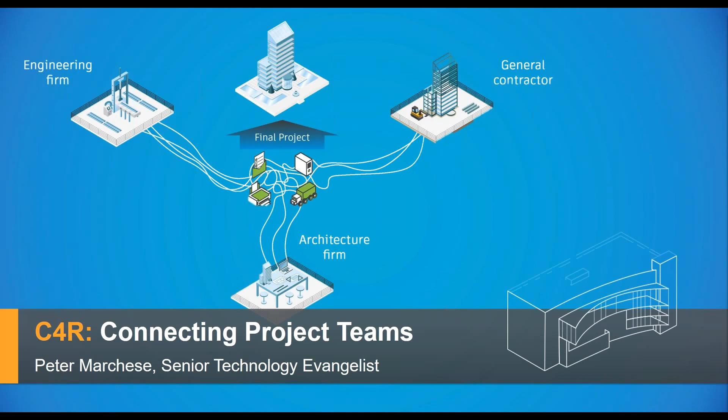So, connecting project teams with Collaboration for Revit. So our agenda today is I'm going to go over what C4R, Collaboration for Revit, is, go over how it actually benefits the project team members and how you can use and access this. I'll be using PowerPoint for the first part of this, and then I'm going to be moving into the software and show you how you can use it and access it from multiple access points: mobile, web, and desktop.

Now, before I get rolling, I do want to ask the audience a couple of quick questions just to get an understanding of what you're currently doing and how you're using your software. So the first one I want to ask is, how are you currently coordinating with other people? Is anybody here using Revit Server? Is anybody sending files by typical email or FTP or Dropbox? And is anybody currently using Collaboration for Revit?

All right, so kind of what I expected. The majority of people are using traditional methods of sending files back and forth. Okay. And just two more quick questions. How are you actually sharing content? Do you access content remotely, or is anybody using the web or Newforma or just typical email?

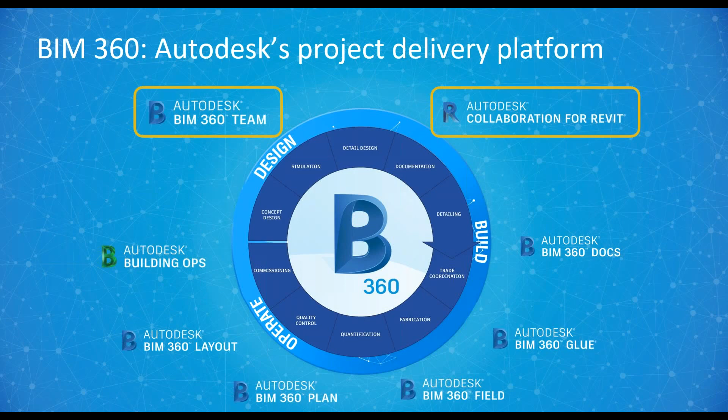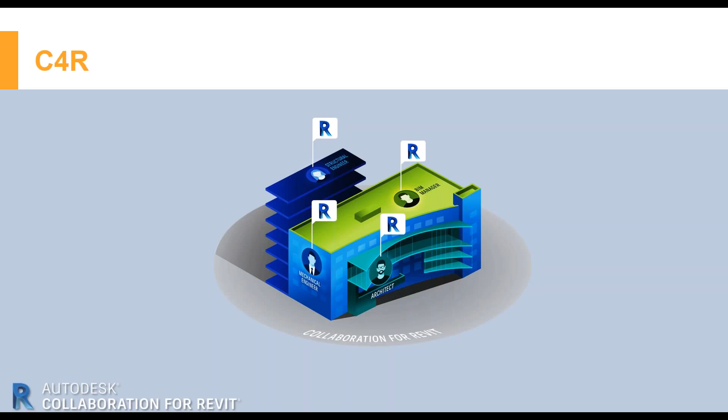Now, for those who aren't aware, what C4R is, it's a way of collaborating in Revit. You've got your different models. You've got the mechanical engineer, the architect, the structural engineer, and anybody else who happens to be working inside the Revit model. And rather than actually setting it up to the point where I send you my file, you send me your file, we're actually working together collaboratively. But it's more than that.

There are different aspects of collaboration for Revit, and one of them is BIM 360 Team. So you can kind of see that as like the outer ring on this. What that allows is all the other people that are working on the project but might not be working in Revit. It gives them the opportunity to participate, to view, to see what's going on without having to take 5 other programs and sort of put them into the mix.

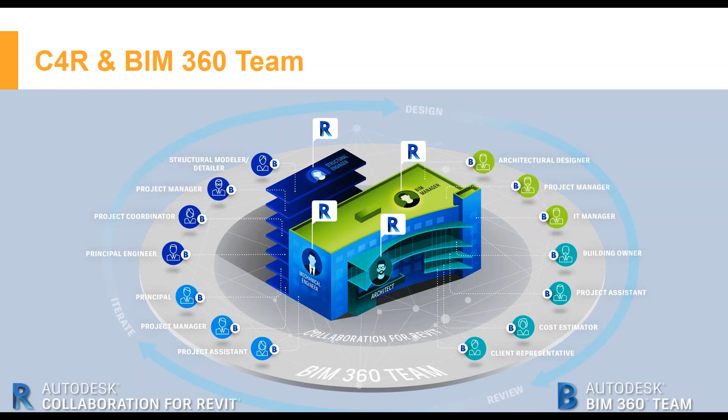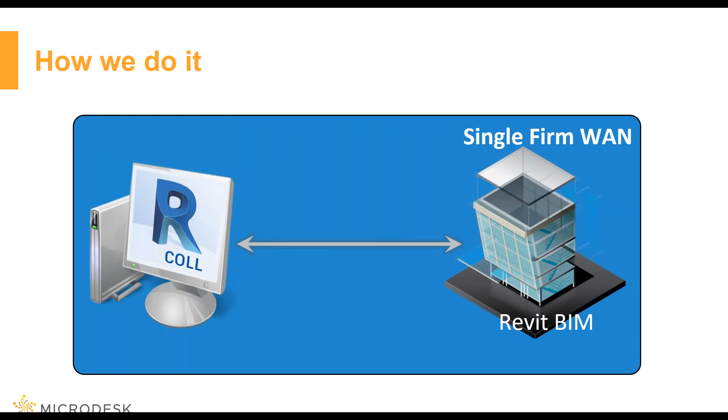So if you want to look at the little bit of details of how this works, typical process is I'm using Revit and we have a single firm and everything's on our network. What the Collaboration for Revit actually does is it takes that central file, so that file that we're all working with, and puts it in the cloud. Then from there, different firms are all accessing that cloud server.

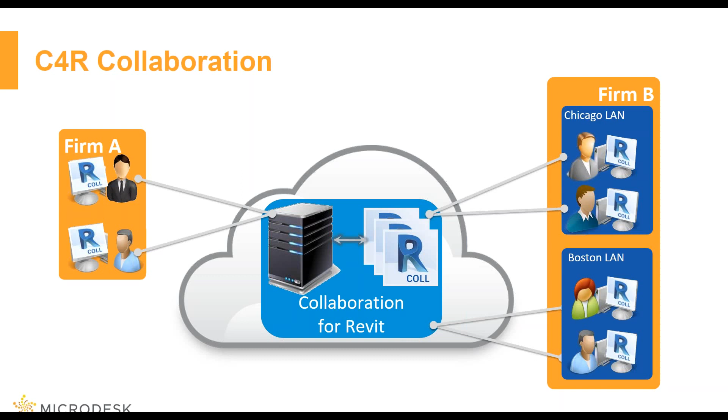So rather than having, I have my central file, you have your central file, and if we want to see them in the background, we have to link them, but we have to email them or upload and download. We don't need to do that anymore. We're actually all working off the cloud files. We're still working on them on our computer in our office, but we're able to sync and work back and forth and see exactly what everybody's doing. And again, I'm going to actually hop into Revit in a bit and show you this.

Now, some of the benefits of this are not just the fact that we can actually work together on models online and we don't have to be in the same office. Big part of this is being able to actually communicate, and there's a tool called the Communicator that comes with this. This makes it easy to actually have a direct chat window. You can also send screenshots directly as part of this, and you can have a team chat where you're talking to everybody else on the project or on different teams.

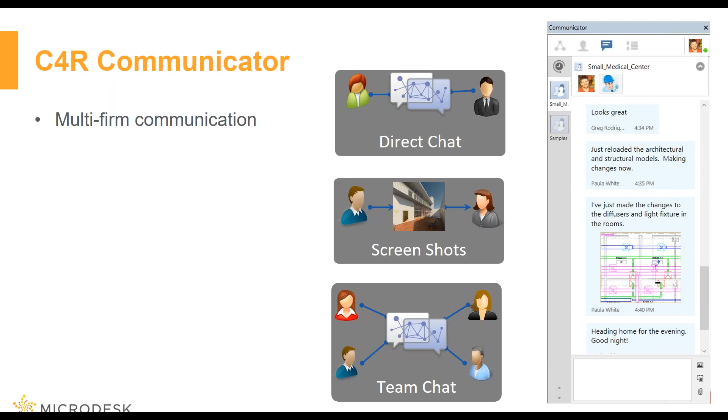Now, from the standpoint of a project manager, it's not bad. You can only add people to this that are working in the Revit model, so you don't have to worry about people using this to talk to friends that have nothing to do with the project. Now, the other thing is it knows what people are doing to a certain degree, and it knows who's actually in the project. So when I talk about contextual awareness, it can show that somebody is actually in the process of syncing. It can show me if somebody is in the current model that I'm in or in one of the other models that are a part of the project.

Another one here is the integrated work sharing feed. So if anybody here has ever used the Revit work sharing monitor, that essentially is built into this. So that way I can track who's syncing. How did it go? Did it fail or was there an issue? So it allows me to get a glimpse of what's happening with everybody else in the project.

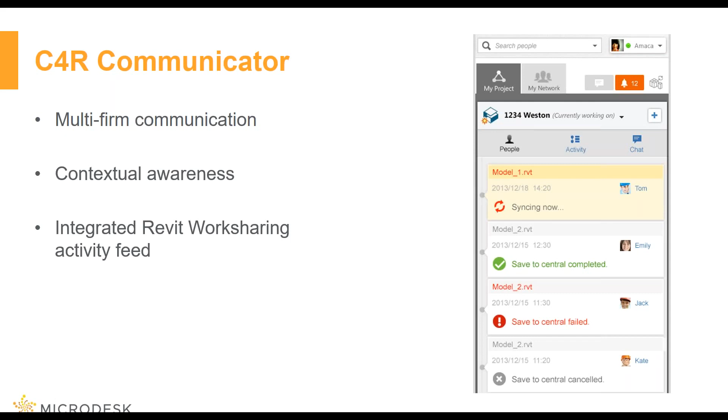So if we're getting ready to print, I can use this Communicator to send out a message to everybody on the team saying, hey, I need everybody to sync, so that way I can actually set the print and I have all the latest information. And then I can use that same tool to track and see, did everybody finish syncing?

Now, excuse me, I keep mentioning BIM 360 Team, and that's because it's a fundamental part of collaboration for Revit. Now, you can use BIM 360 Team completely on its own. You can use it as a cloud sharing and storage site. I can view models and content, but if I'm using collaboration for Revit, I'm going to be on Team. That's actually where my central file will reside.

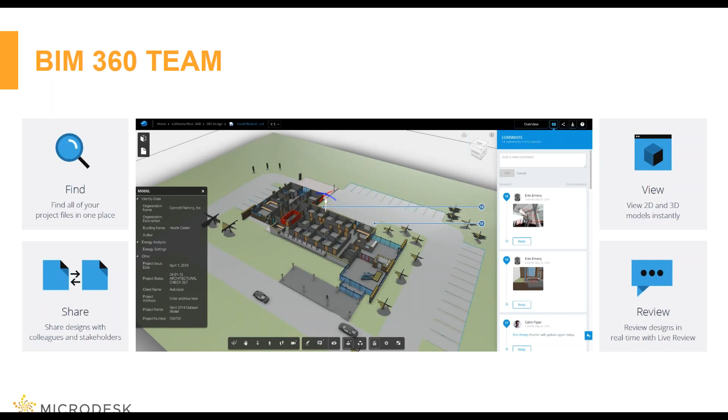So by syncing my model, I'm actually syncing it to BIM 360 Team, and it gives me the ability to find and search. I can track what I'm doing. I can see who else is in there and follow the activity. It gives me the benefit of being able to view my model live in a web browser or on a mobile device. I can do live section cuts.

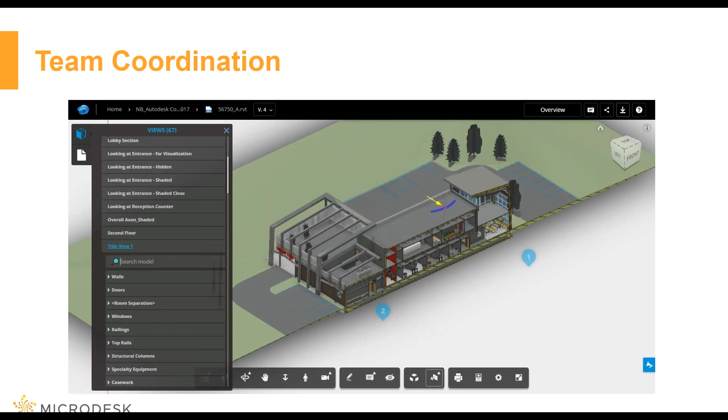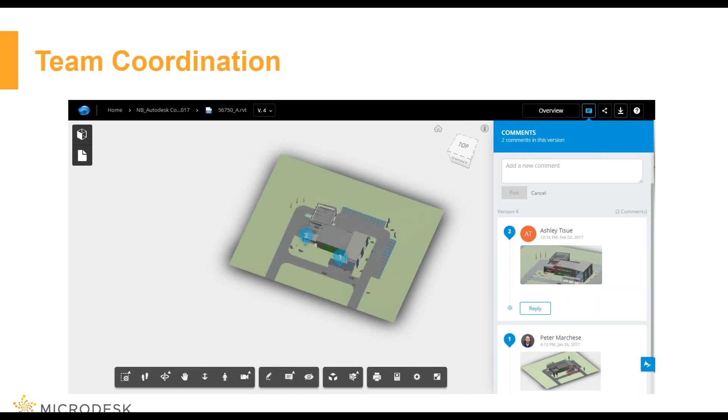So if you've ever had a project manager who liked the idea of Revit but was nervous about using Revit, this allows them to interact with the model, to put in comments or markups and be a part of the project without actually needing to know how to use Revit or be in Revit or scare their team because they're in Revit. And again, this allows me to use multiple devices to be able to track and follow it.

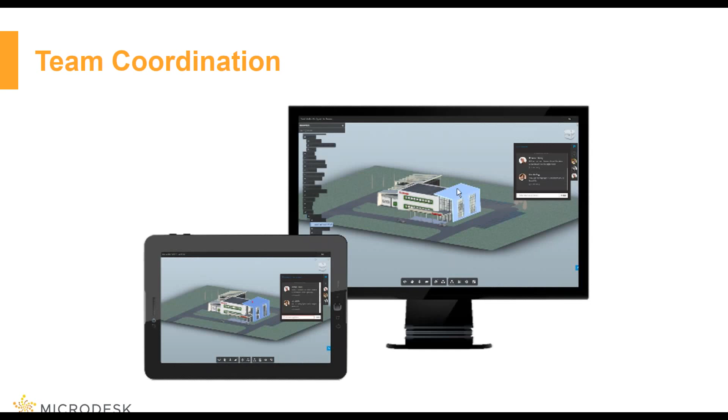And another really big feature from a project management standpoint that I don't think a lot of people are aware of yet is the fact that you can actually track the changes of a model automatically.

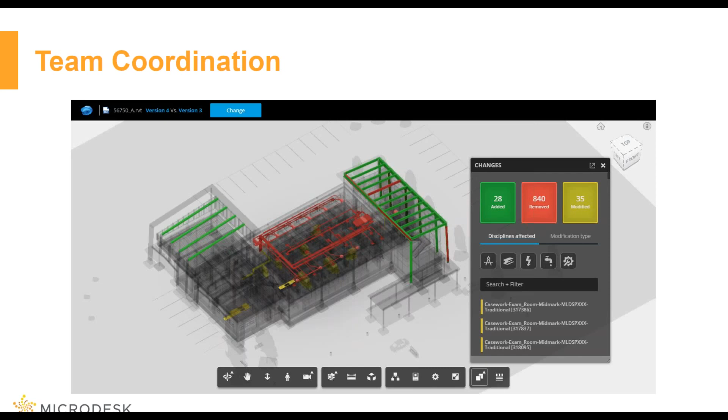I don't have to do any work for this. No one's sending me a transmittal saying we moved these 20 things. I tell it, I want you to look at this version and that version and tell me everything that's changed. And when we start talking about all this, versioning and viewing, there is a large amount of content that we can upload to the cloud servers, in this case BIM 360 Team, and view it.

Now, a lot of people like Dropbox. It's a great tool, and it's designed more for Office. So if I'm uploading Excel or Word to Dropbox, I can view it in the app and the website, and everything's great. It doesn't really lend itself well to AEC, though, and that's where this comes in.

It's designed for that. Not only can it view and read and save and track the project documents like Word and PowerPoint and images, but it's also designed to work with things like my Rhino, my SketchUp, my Revit, Navisworks, AutoCAD. I can upload my content to Team and view it and share it that way.

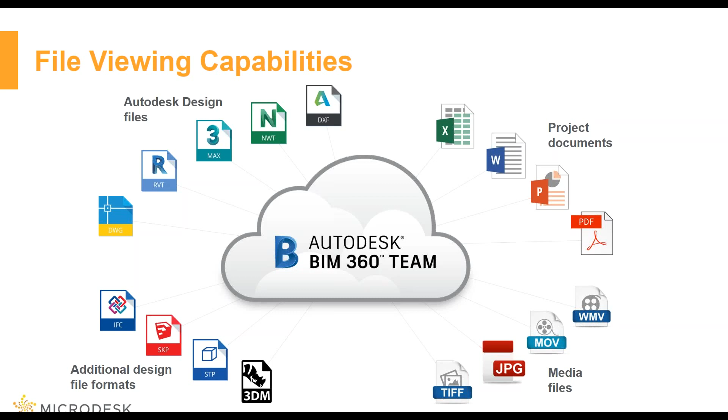Okay, enough of the PowerPoint. So time to actually hop into the software. So what I'm actually going to do is hop into Revit now. Now, one of the cool things about collaboration for Revit is that as you're using it, your typical day-to-day workflow doesn't really change.

The biggest change that's going to happen to your normal draftsperson is where they actually look for the file. So when I go to Open, rather than navigating to my office directory, I'm going to click on BIM 360 Team, and it's actually going to show me all the projects that I have been invited to. Now, in here, I can see a lot of different projects. So if I click on this one, I can open that, and I'll see the different files that are inside of there.

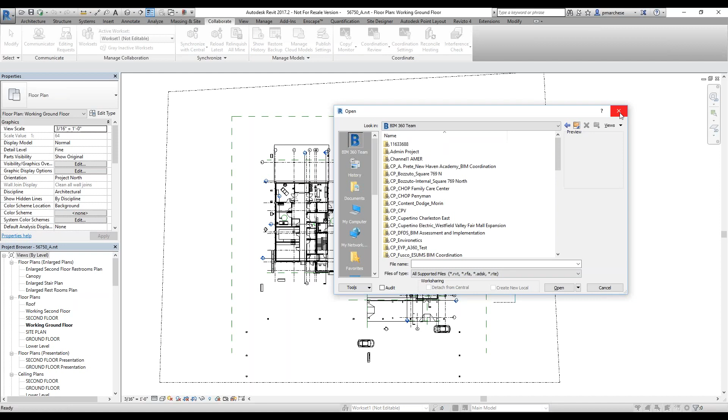Now, a key thing on this is it's not showing me all of the files or projects that I have access to. It's showing me all of the projects that I have access to that are the same version as the Revit that I am in.

So we actually did get a question on this earlier. When you're working collaboratively in Revit, everybody needs to be on the same version. I can always upgrade from an older one, but I cannot downgrade. Same exact thing on here. If the project is on 2017 or 2018 or 16, everybody needs to be on that same release to work with collaboration for Revit together.

So in that case, I would open up my file. It'll download it from the cloud, and then from that point on, it'll always update my local file with the changes that are happening from the internet. So if I have a 300 meg file, I'm not downloading 300 megs every single day. I'm just downloading the changes to my file.

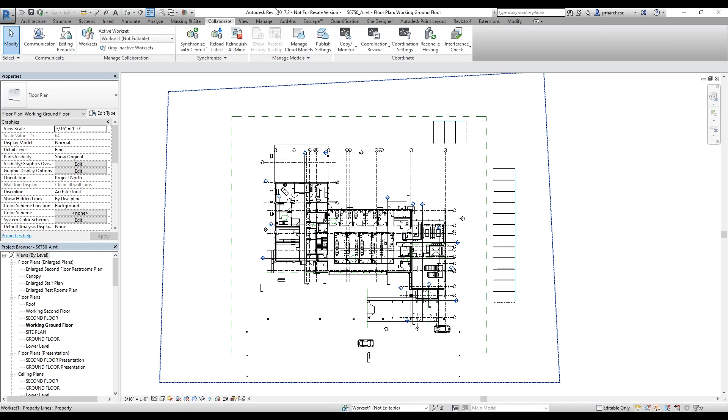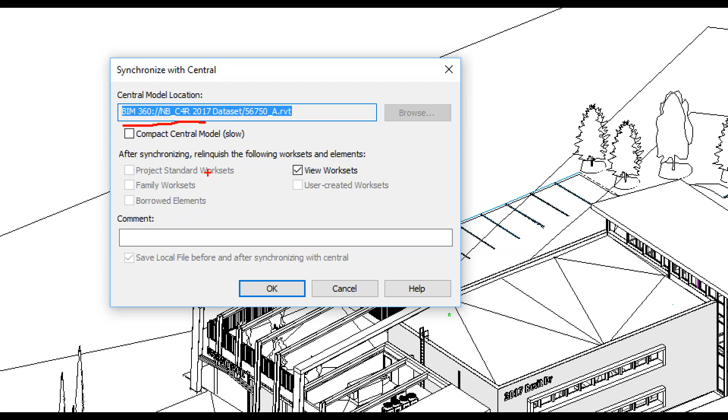So as I work day-to-day, I go about my normal business, make my changes, edits, markups, whatever has to happen, and then I would synchronize. And sync to central hasn't changed at all. The only thing that's happening is that now when I sync, notice it's actually syncing to the cloud. It's not syncing to a local network drive. But to a normal user, that's transparent. It's not going to affect how they actually work.

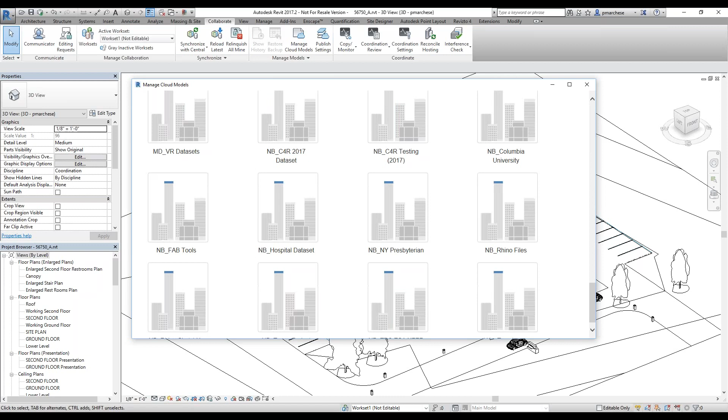To somebody who is sort of the model manager, they're going to have a couple of extra features. So if I say Manage Cloud Models, this will show me all the different projects that I'm a part of. And in the case of the one that I'm in right now, if I go down to my, let's see here, there we go, data set, I can see the models that are in here.

Now, one thing you might notice is that I have this little box with an arrow. However, this one here is a green checkbox. If I see that little green dot, that lets me know that the version that I am in right now in Revit is the same as the version that people will see on the website. If I look at this one up here, that means the version I'm in in Revit is not the same as the web version. Now, that's not a mistake or a problem.

What that means is that I'm working in Revit, and everybody else who works in Revit, we're all going to see the most recent model. I sync to central, you reload latest, you see my changes. That's as it should be. But if I invite someone just to view the progress, they're not actually a part of my project, they're just going to the website and actually looking at the progress of the project. Maybe it's the client.

I don't necessarily want them to see my work every 5 minutes. I might want to go to the format where I publish the work to them every Friday or once or twice a week. In that case, that's what I'm doing right here. I'm essentially publishing my work to the cloud for others to be able to view. And Revit takes care of all of that tracking. So I can upload this, I can publish it,

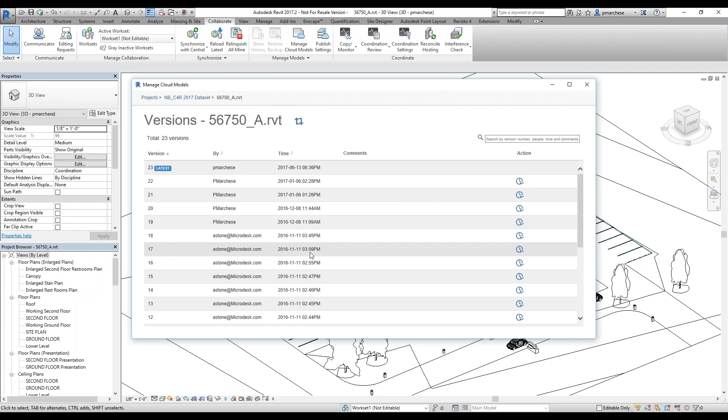I can view the different versions of my model. And unlike the desktop where I tell it how many backups I want to keep, this tracks all my backups. I can see when I saved, when other people saved, what version it is. I can roll back if need be. So I have full control over all of my backups to archive or to manage my project.

Now, one of the things I mentioned before was my communicator. So when I bring this up, I can see that I'm here. I see which project I am currently active in. And right now I can see that the other people that are a part of my project are not currently working because their status is showing up as gray. So if they were actually in one of the files in the project, not even the one that I'm in, but maybe the mechanical or the structural, they would show up as green, and I would see which file they were in. And I can also see the status of the other projects that I'm a part of.

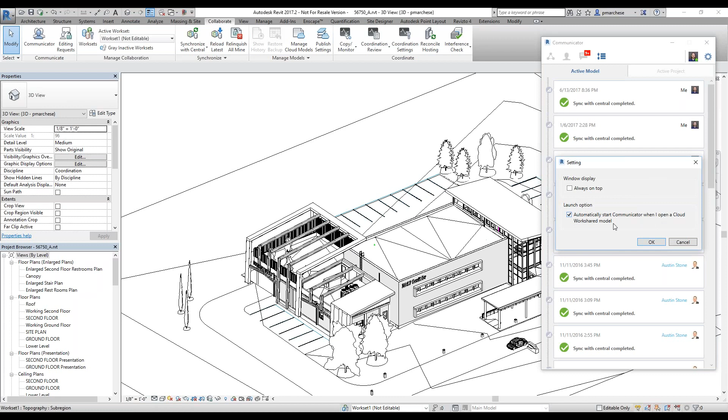I can move into them. If I need to, I can instant message or chat with other people and see what's going on. And I can move back and forth between multiple projects, as most of us probably are, working on more than one project at a time. And then as I work on this, I can see what the status is, what's going on, when it's saved last, and how things are going on. And I can actually modify some of my settings in here to keep it on top, or to say, you know what, only open it up when I want to.

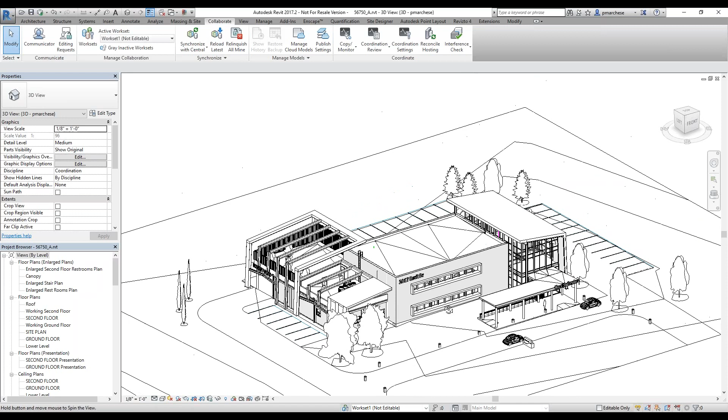But that's one of the nice features about C4R is that it's not going to really change your day-to-day workflow. It just enhances it with better coordination abilities. Now, there's one other thing here called publish settings. I'm going to touch on that in a minute or two once I get to the web portion of this. So you're working normally, day-to-day. I publish to the cloud, and now other people in my project, they'd actually like to see what's going on. So what I'm actually going to do is I'm going to open up my web browser for a second.

And I've gone to the BIM 360 Team site for Microdesk. So I can see the different projects that we have. I can see the current activity to the site. And what I'm actually going to do is I'm going to hop into the project that I was just inside in Revit. Now, in here, I can manage my project. I can see who's a member of it. I can check my activity. I can see if there's any discussions or a calendar.

So if I wanted to put something on this calendar to ensure everyone on this project knew when our deliverables were, what the due dates were, what had to be done by a specific point in time, I can put that in there so it's in a central location to everybody, not just the people in my office. And I also have the ability to have a wiki. The wiki could essentially be the project BIM execution plan. Again, if I want to put it in a central location, it tracks versions. People can get notifications when it gets updated. I can put that there.

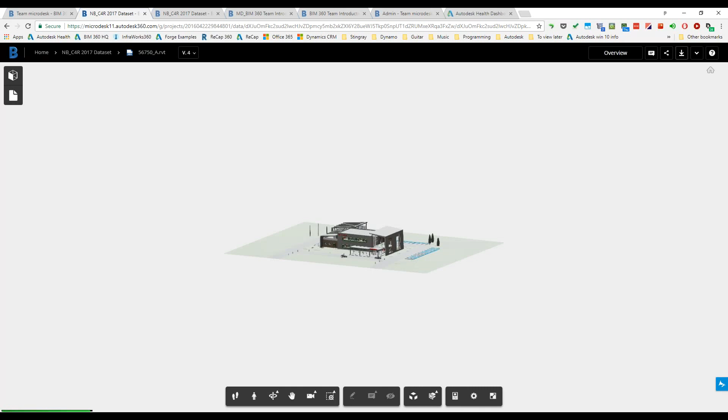But what I'm going to do right now is I'm actually going to click on my file. And again, I can see that I'm currently in version 4, and I have typical sharing and download features. So click on this, it'll think for a second, and then I can view that. And key thing here is I don't need plugins. I don't need to download anything extra. I'm just using a web browser, and now I can actually navigate and interact with my Revit model right here.

If I click on elements, I have the ability to isolate, hide, focus, or look at the properties. The information that happens to be in these objects will be visible. Now again, this is more of a viewing tool. I'm not going to start changing information here.

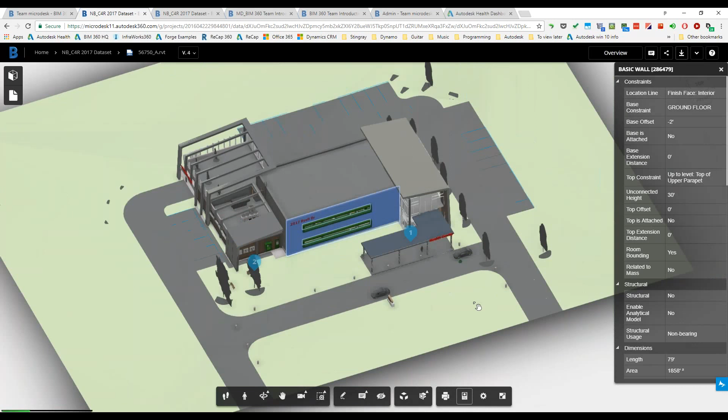This allows me to start to infer information from the project. Now, one of the things I mentioned I would cover again when I got in here was what I could see. If you remember back inside of Revit, I had that publish settings right up there.

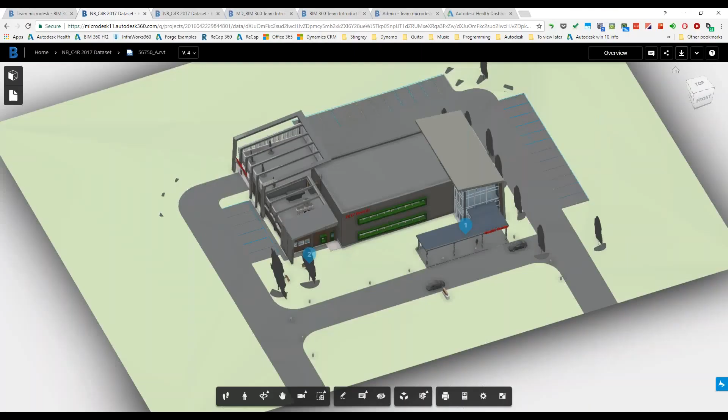What that actually allows me to do is control what views inside of BIM 360 Team are visible. So if I'm publishing this for people to see, people that might not be part of the design team, whether it's the client or an outside consultant, there might be working views that have notes or look like a mess if you're not aware of what's happening in the design. I don't want those to be visible. So I can choose exactly what views I want published with that version of my file.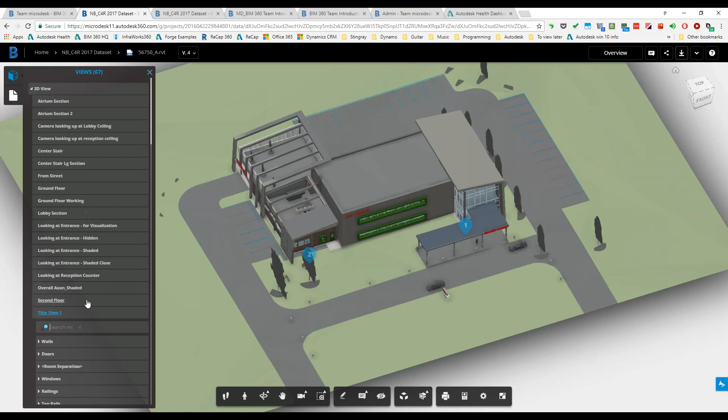So when I'm looking at this now, I can see my 3D view. If I want to move to a different view, I can. And it's not just 3D views. If I want to look at elevations, sections, floor plans, or even the sheets, I can do that as well. So if I go to my site plan, this will switch from looking at a 3D view to my site. Not a very well done site plan, but a site plan. And when I'm looking at my sheets, I actually have the ability to do dimensions as well. I can get measurements off my drawing. And I can also print this directly to a PDF now too.

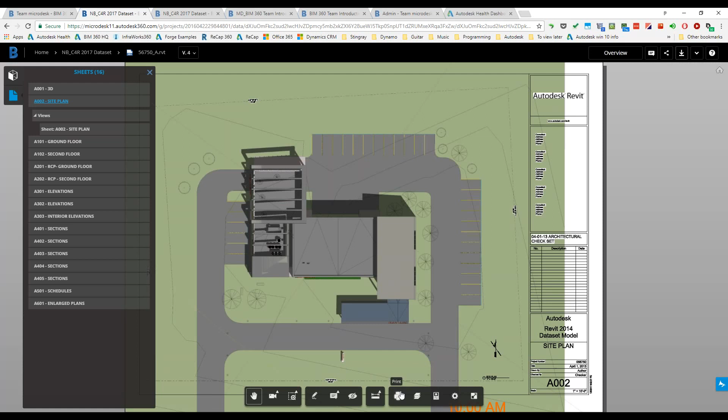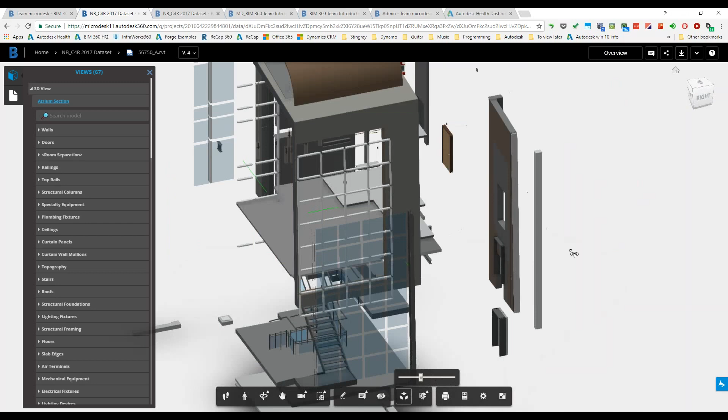For now, I'm just going to hop back into a 3D view for a second. And if I'm looking at something and I'm not sure about it, I have the ability to sort of disassemble it a little bit. So for sections like this, where I'm trying to get an understanding of how something is coming together, how it's being constructed, this helps me get an understanding of it. Additionally, I can always just do a live section cut too, so I can sit here and just drag this through in the web browser, so I have a better understanding of where things exist and how things are.

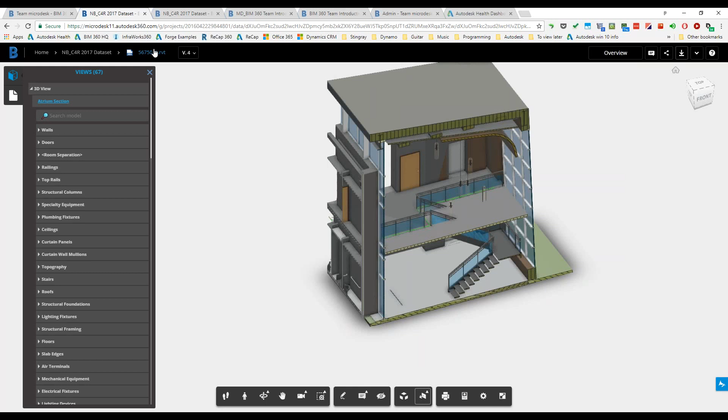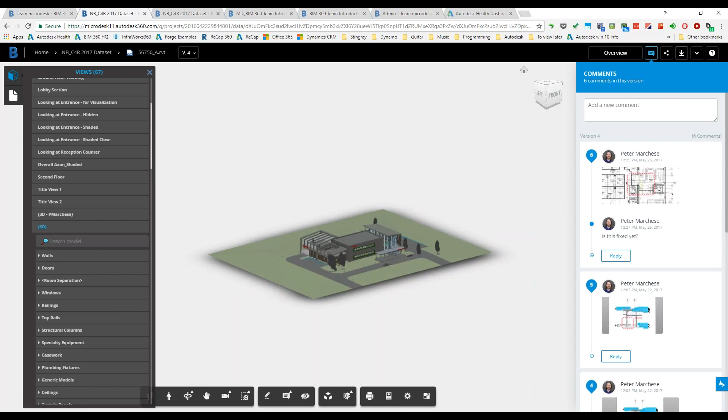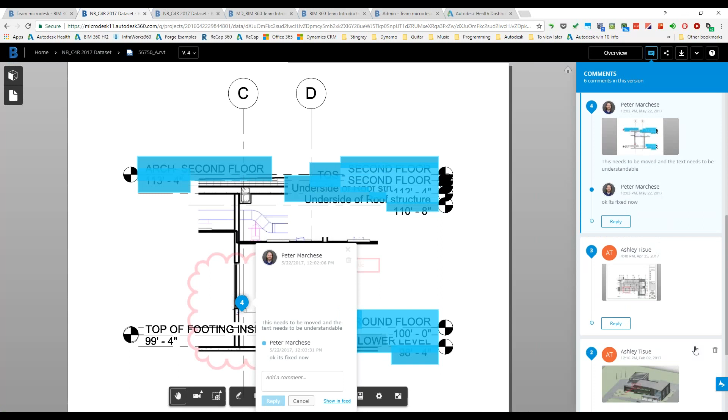Now, outside of this, there's a lot of other tools I can use. I can do my markups, I can do my coordination, and I can put my comments in here. So if I have somebody on the team reviewing this inside of BIM 360 Team, maybe they're looking to move away from printouts, or they're trying to lock in on one thing, I can use this to actually track my markups. I can create clouds or callouts, put in text and comments, and I can actually see when that was done and what version of the file I did that in. And then somebody can respond to me, okay, it's all fixed.

And if I have something I want to show to somebody, but I don't necessarily want them to be part of the project, one of the things I have the ability to do is a live review. What a live review is, is that I can invite somebody to see this. They're not part of the project, but it's sort of a guided tour. I can actually lock my camera to their camera, so when I say okay, now if you look at this, I know they are looking at the exact same thing that I am. It makes it easier to control what other people are seeing. And when the live review is over, so is their access. So you can manage that.

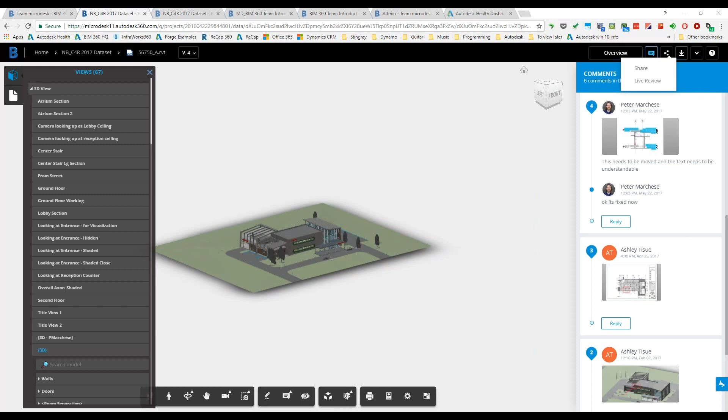A question that came in is, can you use this for spatial coordination on a project? Yes. So if I want to, I can create my section boxes, bring this in, and actually rotate the section box if I want to cut around something and move through the process.

One of the things I mentioned earlier is that if you're using collaboration for Revit, you're going to have to use BIM 360 Team, that's where it stores its central file. But you can use Team completely on its own. In that case, I can still upload, just drag and drop my Revit files to the cloud, and I can still use this kind of feature to mark up, comment, and view those models.

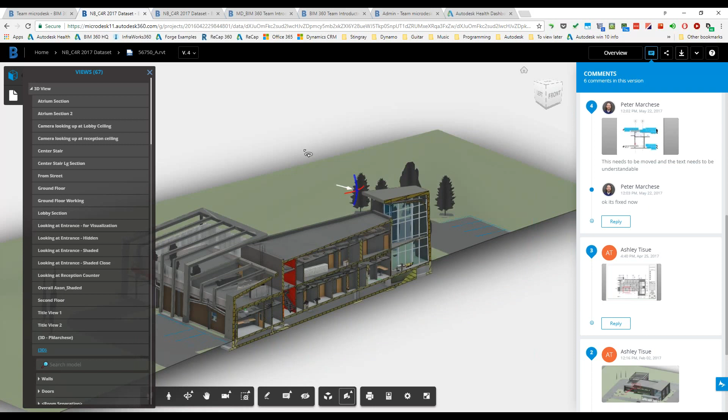Now, one of the other things I mentioned that I really like here is the ability to compare versions. So in this case, I'm going to say compare versions. It opens up another tab, and I choose which versions I want to look at. So in this case, I'll say version 3 against 4, and I tell it what view I want to look at for this.

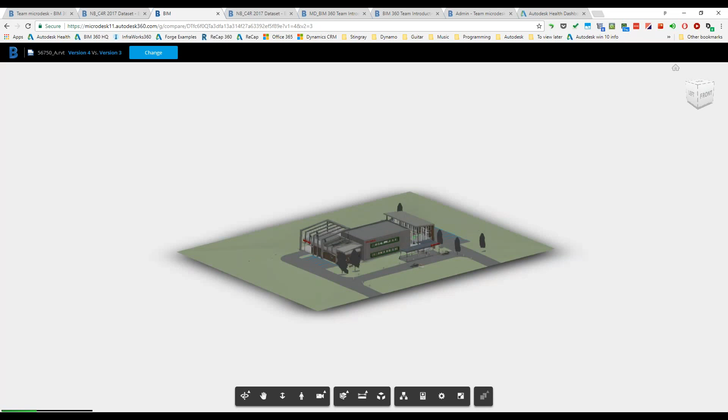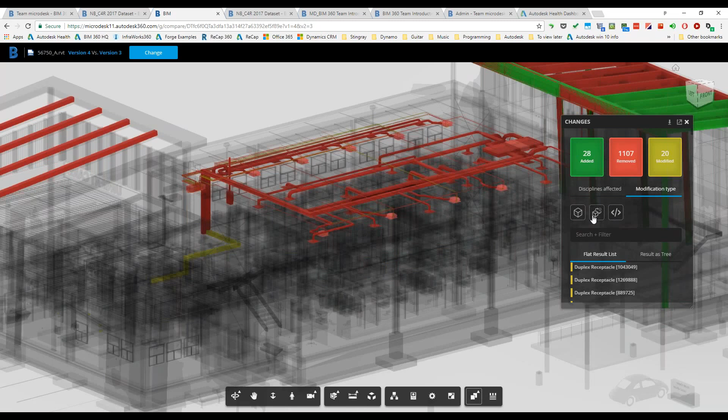So it'll think for a second, and when it finishes, anything that hasn't changed will be a translucent gray. Everything that's been added will be green, demolished will be red, and modified will be yellow. And the wild thing about this is that when I say modified, I'm not just talking about they moved it left or right or up and down. It also looks at properties. So if I've updated a door to have a fire rating or a hardware set, I can go to my modification type and say all I want to know is if they've made property changes, because I can filter, search, and look through this.

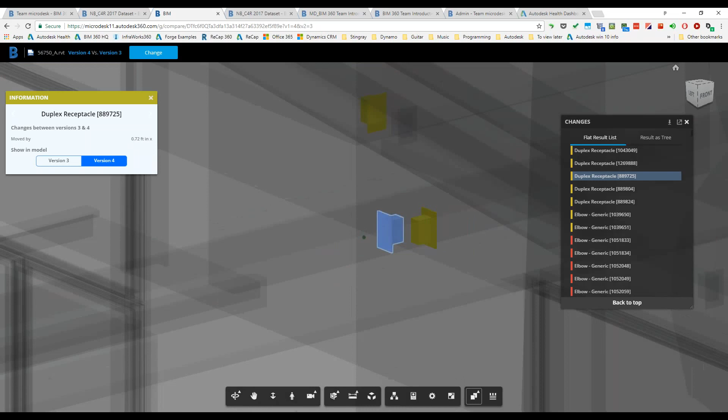If I click on something down here, it'll actually take me to it. One of the neat things here is that if I click, I can actually animate the process. So, okay, it moved. Where did it move from? I can go from 3 to 4, and I'll actually see it tell me specifically the distance it went, and show me physically how it actually changed. So it makes it a lot easier for me to actually understand what's happened.

So if I'm receiving files from my other consultants, no problem. Now I can actually say, okay, well, this is the new one they sent me. What am I looking at? What did they change? Did they change the things that I expected? Are there little things that I would have completely missed had I not been using something like this to track all of the changes?

And there was a question earlier about the versioning. Basically, if you're in Revit, everybody has to be in the same version. However, all the things that I'm showing here are available for all the versions of Revit that work with collaboration for Revit. So 18, 17, 16, you're fine for C4R, and all these features will work in Team as well.

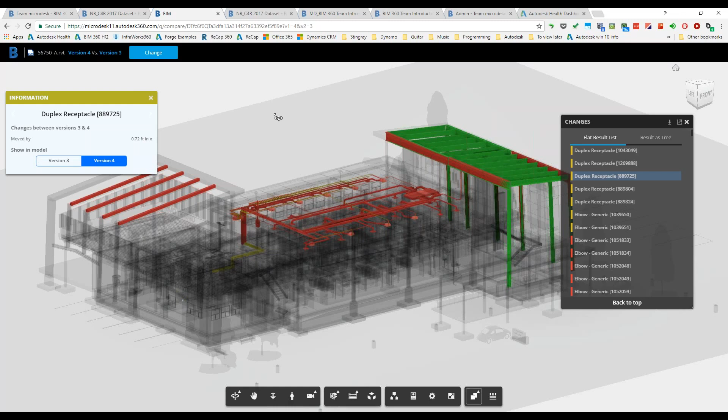Okay, now there we go. So we've got our BIM 360 team on the website. I'm able to interact with our models. I can see the comments that people have. Now, let's say what I'm doing is I'm on my way to a project meeting, and I need to show something, but I forgot to take the model with me.

No problem. Let's say you have a tablet. In this case, I'm going to go to the same project I'm looking at now, and you can see the question about 18, no problem. Works on 18 as well, and 15 too. This data set just happens to be the 17 one.

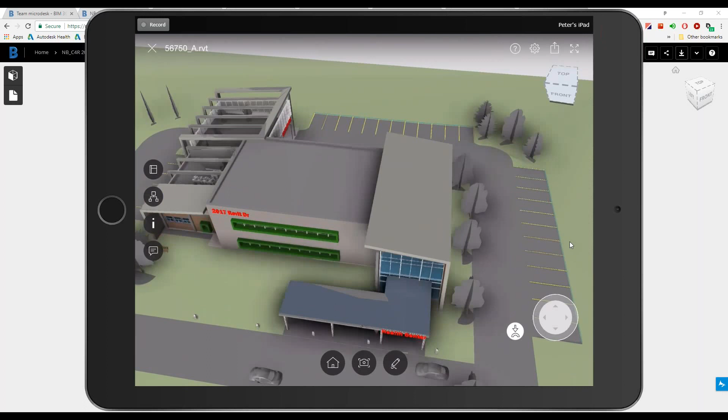So I can see the exact same models that I had online. Click on that, that'll open it. Now I don't have all of the same features, but if I want to navigate the model, I can look in here. If there's something I need to actually see, again, that 1 and that 2, notice the same thing.

1 and 2, my comments that I have are part of the project. They're not part of the website. They're not part of the mobile app. It's part of the BIM 360 team. I can click on that, and that shows me who did it and shows me the note.

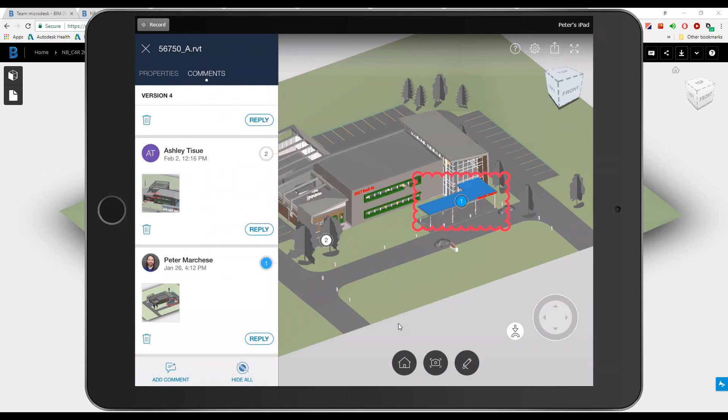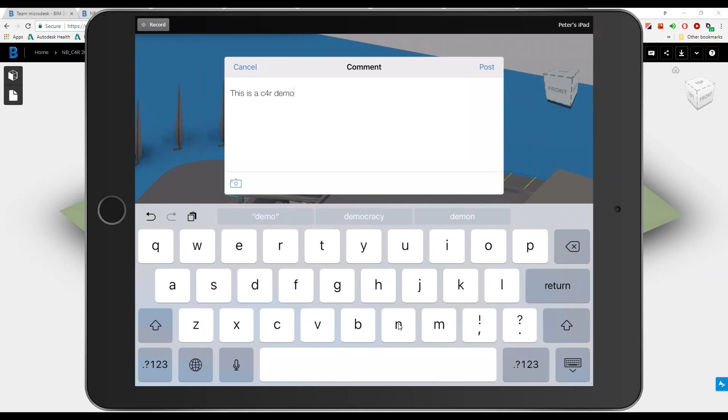So I can go back and forth and see the comments. And if I need to, I can always say add another comment. And post that. And now I can see that.

And that was in version 4 of the file. Because it knows not just when from a timestamp, but when from a model progression that I put that in there. And if I needed to do a markup, I would just tell it I want to do a markup, and then I can draw.

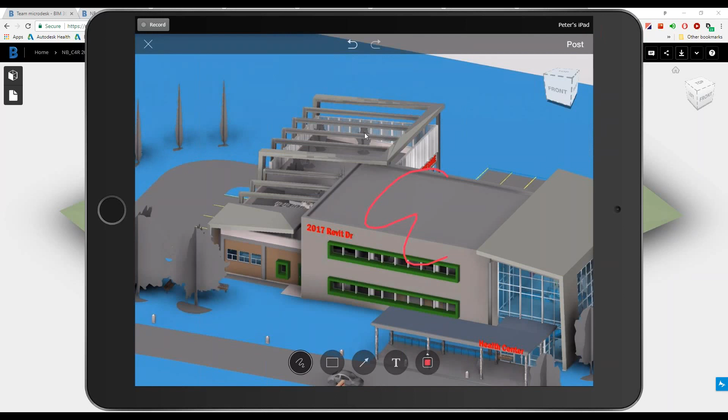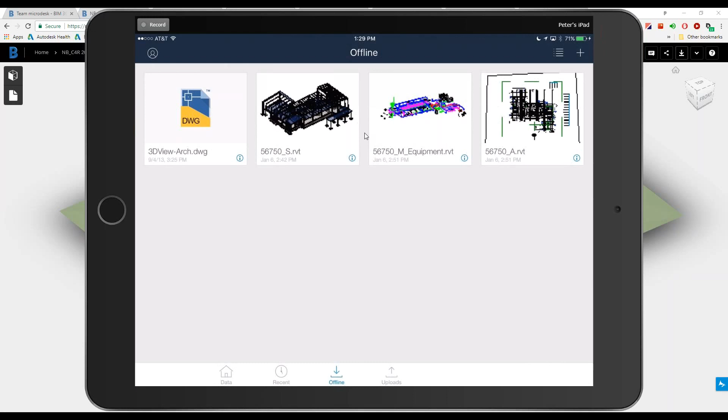And once I've opened up this file, I can still get my properties and information out of it. But because I've opened it up, it's now on the iPad, so I can actually open this up offline. So if I'm going into a meeting that has really bad reception, or I'm going to be in an attic or a basement, and I need to have my drawings with me to actually review things or to mark them up, I can use this for that.

And again, I can see my activity in the project, and if I've set up a wiki, I can see it here.

Now, in terms of a wiki, I'm going to switch over to another project we have. So if anybody is curious about what models might look like on the side of Team, definitely reach out to us after the webinar, and we can invite you to an introduction project that we have.

And one of the things we actually have in here is our wiki. And that is basically just formatted just like you would a Word doc. It has some information like frequently asked questions, how you can use things. You can put in graphics and information.

So a lot of our clients that use this, if they put information in the wiki, it's contact information, who to reach out to for what people are working on the project. And you can have multiple wikis, you can edit that, and you can put comments on it too, just like anything else.

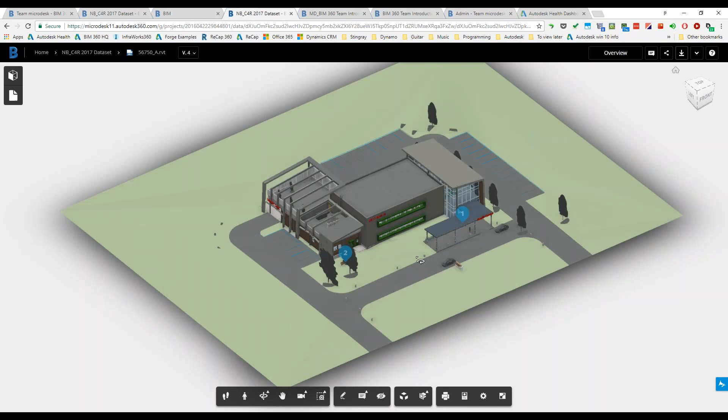One of the main things here is that everything is meant to be very user-friendly. I can always look at the different versions of the file. If something goes wrong, I can always promote an older version and roll back. And I can always see the overview of my project and the overview of each individual file at any point in time.

One of the main things here is that collaboration for Revit's focus is being a collaborative environment. There's two aspects of it: you've got the BIM 360 team and the collaboration for Revit.

There's a question about whether you still need to use copy monitor. I would say yes. The reason is that compare changes will show me what's changed in the model, but it's not going to update my model. So if I'm using copy monitor, say between the architect and the structural engineer, to ensure my grids stay coordinated, this service will tell me if objects have moved, but they're not going to be able to move elements in my file. Same thing for an architect and MEP, for fixtures or services like toilets or lights that we're coordinating via copy monitor. So you would still want to use that in addition.

Another question is how an owner might actually use collaboration for Revit. A lot of times if we're talking to owners about something like C4R, they're looking at it from the standpoint of facility management or maintenance. So now I have a site that can hold all my drawings, models, and information in a place that's easily accessible and understandable. If I need to find out where something is, I can search in the model, draw things on it, and say we need to fix this. But it's also, from a design standpoint, an opportunity to engage the project team, so it's easier for them to understand what's happening when you can use something like a guided tour to show them your design intent.

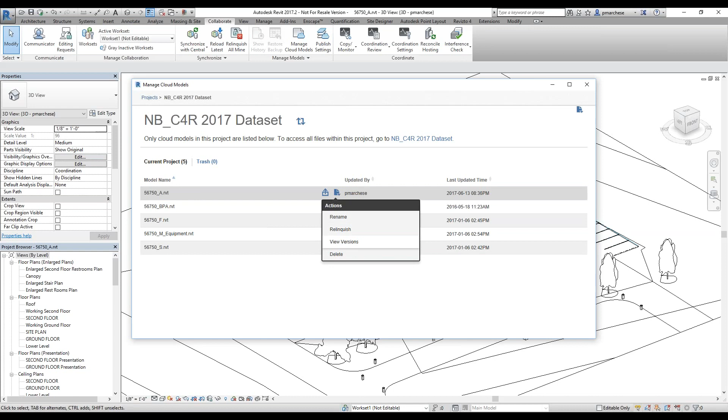When I'm looking at this, I can see the different versions of the file I'm looking at right now. Currently I'm looking at version 4. Now if I switch back to Revit, what I'm actually looking at is the same file, and I'm going to say I want to see view versions. What you're going to notice is that these don't necessarily line up.

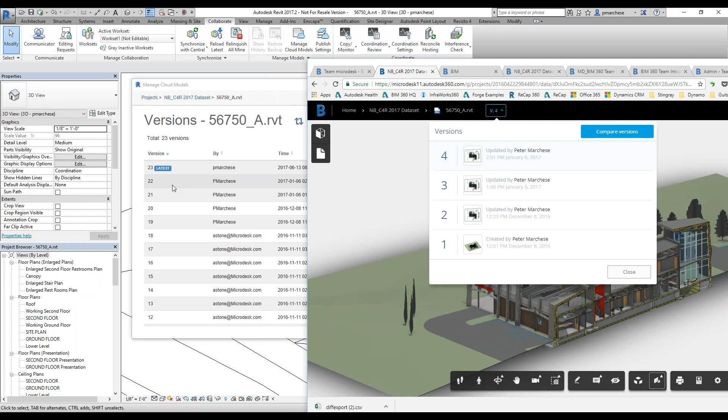The version that I see in the cloud are just the published models. The version that I see inside of Revit is every single time I sync to the central file. So it's very much like my internal saving process. I'm on version 23, but I've only published it out 6 or 7 times.

Question: what is the difference between syncing with the cloud model and publishing your model to the cloud? That's exactly what we just looked at. When I sync, I'm saving the Revit file for everybody else who's using Revit so they can see my changes. But when I publish it, that means somebody who goes to just the web or mobile version will see that change. And it's always going to publish whatever the most recent Revit save is at that point in time.

Another question: do all team members need to have C4R, or is this something a model manager can control? Anybody who is just accessing the website, they're just using Team, they don't need C4R. All they need is to be invited to the project, and there needs to be a seat of Team available for that person, or an entitlement. However, everybody who's using Revit is going to need an entitlement for collaboration for Revit. And for using the BIM 360 iPad app, the app itself is completely free.

And if you are using A360 Drive, you would use the BIM 360 Team app to view that too. But all you need to access Team is just an invite to a project, and the person inviting you would just need to either have a free seat to assign you, or your company would have one.

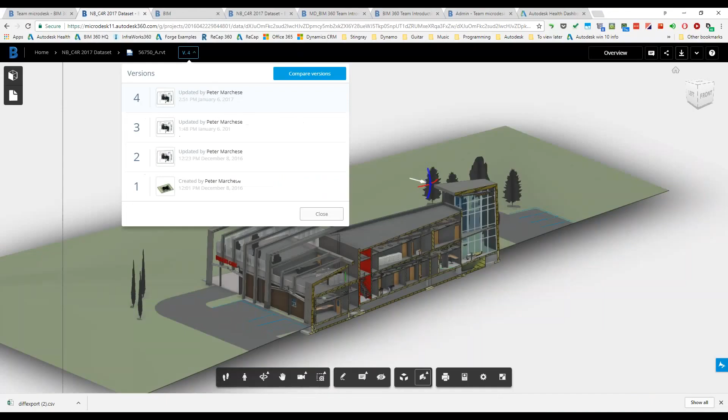Question: can you create a backup or recovery file from each sync? Yes, you can. Every one of these backup files I can roll back to at any point in time. I can restore back very quickly. And I can also go to all the ones online and download those. So if I go back up to my project folder, I can move or delete here, and I can download there.

So there currently isn't an automatic setup for archiving or downloading, but you can download your backups. And the automatic question from before: does it automatically manage the cloud models? It will not automatically publish for you, and you can't set a schedule currently. I believe if you have somebody who can program for your office, you can take advantage of the Forge APIs to do that. But out of the box, no. Right now it's a manual process where I would go up and say I want to publish my models.

So a couple questions here regarding is BIM 360 free? We're talking specifically BIM 360 Team. You can be invited to multiple team hubs or sites, and you can switch between them by clicking on your avatar in the corner. Now, you can create your own free BIM 360 team. You'll start off with a trial, and then after the trial ends, you'll be able to use it for yourself. There will be a certain time frame.

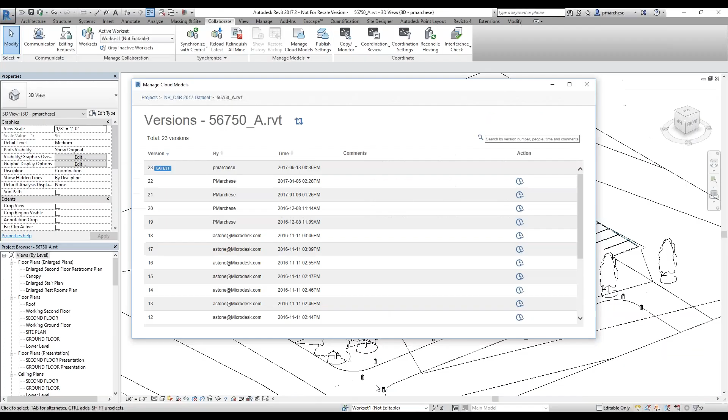Now, let's say that I'm in Revit, and what I'm doing is I'm going to link in a CAD file. And when I do that, I link it in off of my local network, which is going to be different from my engineer's network. As long as nobody unloads the CAD file, that will actually be cached and travel with the model. So they won't actually need to see it on their network for them to view it. Now that's not going to work for Revit files, but it will work for CAD files.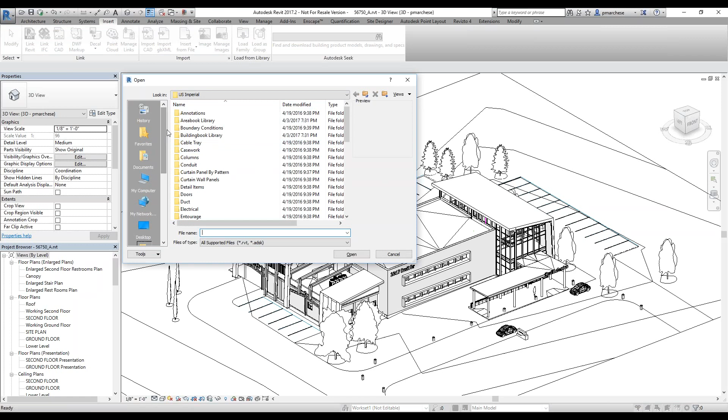Good question. No, you cannot. So the question I just got that I wanted to look into is, can you insert 2D views from file and pull details from a model that's actually living in the cloud? No, you couldn't, at least not at the moment. So what you would have to do is just download that file, and then you can do it from it on your local machine. Good question, though. I hadn't seen that before.

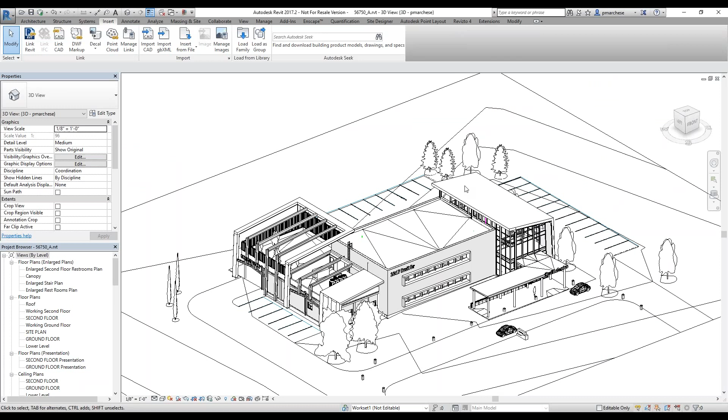So question about linking CAD files into Revit, mentioned that before. If what I do is I link it in and it's only accessible on my network, not the engineer or a different office, as long as nobody comes in and actually unloads the file, it'll stay cached with everybody else.

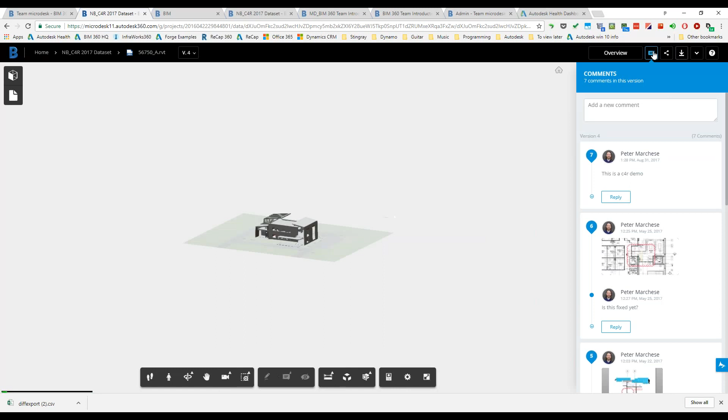So can we create a log of markups? So when I'm actually looking at my model, let me hop into it real quick here. So I've got my comments here. One of the things that you can do is you can essentially save these, but it's not like some of the other services that are a little bit more specific or a little bit more locked down. I do have the ability to actually delete a comment. So that is something to keep in mind.